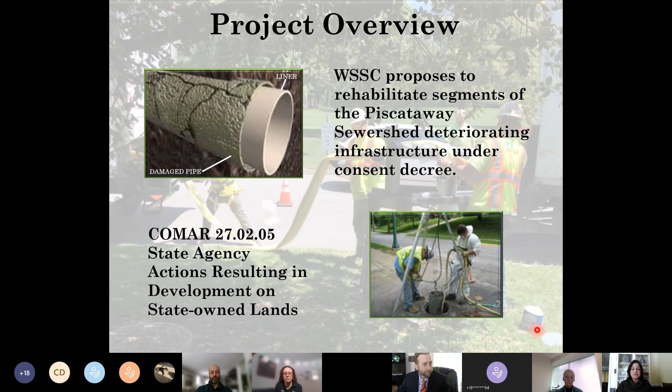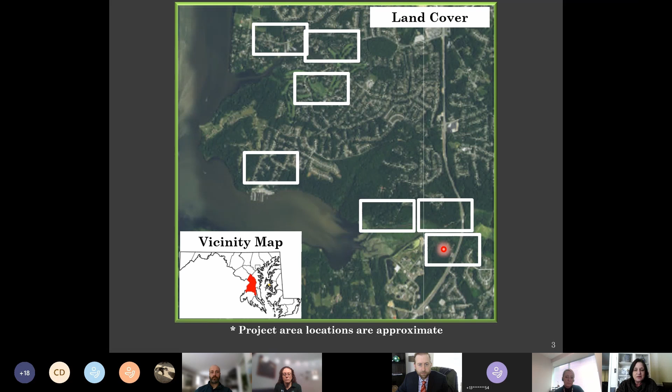Within the project area, there are steep slopes, hydric soils, highly erodible soils, and streams. You can see subdivisions impacted by the project areas, and natural resource parklands owned by Maryland National Capital Park and Planning or National Park Service. In addition, there are forest interior dwelling bird habitat areas within the project areas, depicted in green. There are also wetlands within some of the project areas, including both non-tidal and tidal, and forested and non-forested.

I did forget to mention, maintenance to existing sewer lines is permitted under the MOU between the Critical Area Commission and WSSC. However, the temporary impacts to the expanded buffer, which is considered an HPA, makes this property ineligible for review under the MOU. And because WSSC is a quasi-state institution, and since the project is ineligible for review under the MOU, we are bringing this project to you per COMAR 27.02.05, regarding state agency actions resulting in development on state-owned lands.

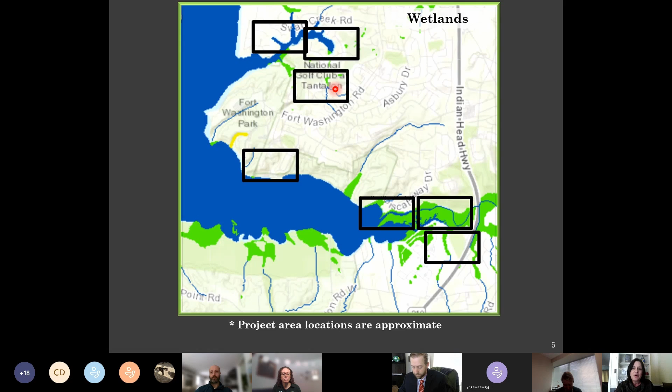So there are 6.91 acres of the LOD located in the critical area, of which 3.25 acres are located on lands designated as LDA, as depicted in yellow, and 3.66 acres of land designated RCA, as depicted in green.

I'm going to go through the next series of slides, which will be 7, and briefly discuss the impacts in each of the project areas and how it relates to the expanded buffer. The buffer has been expanded because of highly erodible soils, hydric soils, steep slopes, water bodies, and non-tidal wetlands. Here, project area 1 is delineated, showing where it is in relation to everything.

The red line depicts the expanded buffer, and the purple line depicts the critical area 1,000-foot boundary. The orangish areas are the LOD, where the areas of impact are. The buffer has been expanded for steep slopes, and the pinkish color is steep slopes 25% or greater. It might be hard to see, but there are little yellow patches intermixed, which are steep slopes 15% or greater. On this project area, we have the LOD impacting within the steep sloped and expanded buffer area, and also just within the 100-foot buffer.

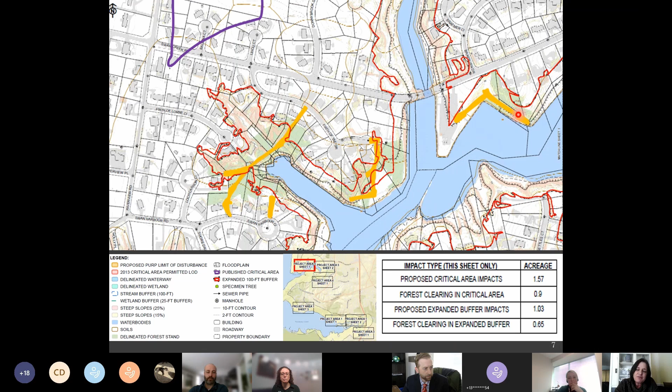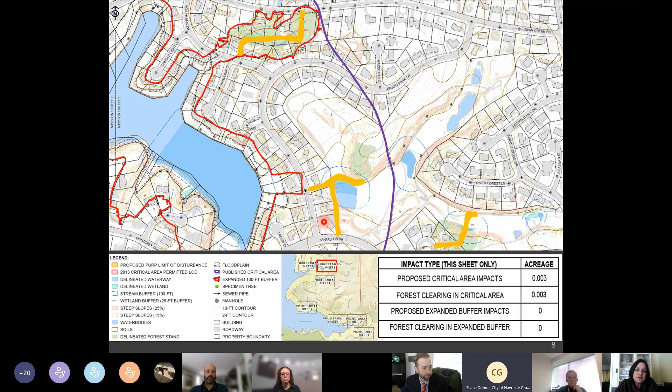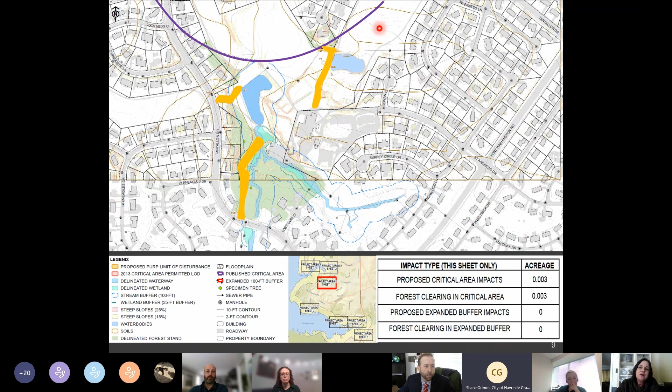Project area 3, you can see there were no impacts to the expanded buffer, just to the critical area. So here you have the critical area 1,000-foot boundary.

Project area 4, this is where it gets complicated with buffer expansion. We have steep slopes, non-tidal wetlands here in mint green, some waterways, and although not delineated, within areas of the steep slopes we have hydric soils and highly erodible soils. The buffer's been expanded conservatively to include most of the LOD, using the ridge of steep slopes to delineate, since you can continue to expand the buffer. So we made sure it was conservative to keep the LOD inside the expanded buffer.

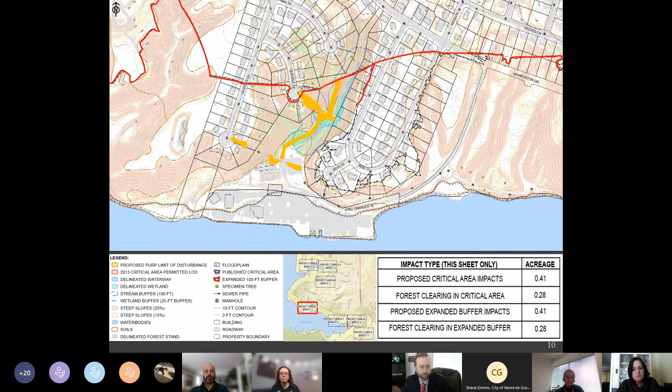Project area 5, it's the same scenario. You have the expanded buffer, the steep slopes, the non-tidal wetlands, and hydric and highly erodible soils.

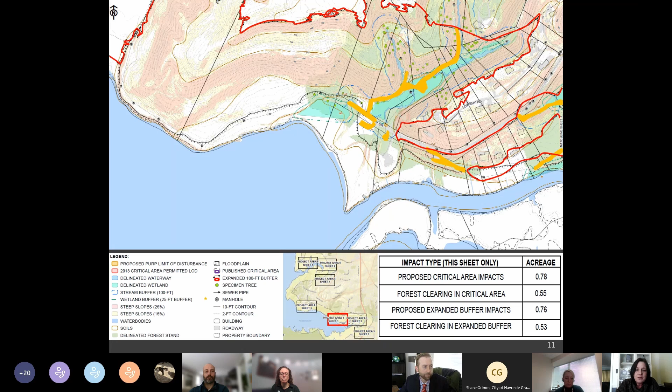Project area 6, same scenario. You can see the LODs are all within the expanded buffer.

And then project area 7, it's very messy here, but you can see the 1,000-foot boundary, and how the steep slopes really dictate how the buffer's expanded. So we have the LOD hitting inside the expanded buffer, outside the expanded buffer, as well as outside the critical area.

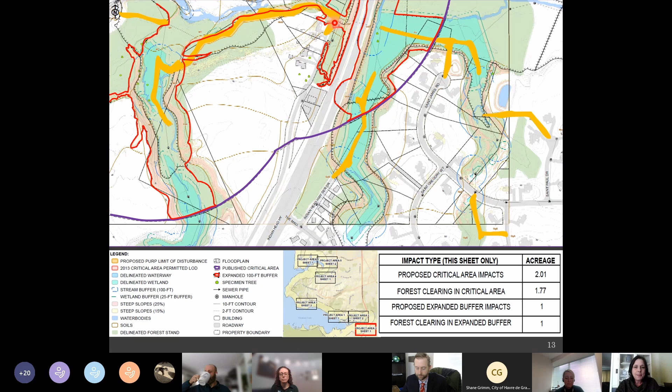So the proposed clearing in the critical area in total is 5.07 acres, of which 3.6 acres is located in the expanded buffer. Temporary impacts comprise 1.84 acres, to allow for site access to the manholes and to haul equipment. WSSC proposes to mitigate and provide 5.32 acres of reforestation at a rate of 1-to-1, both inside and outside of the expanded buffer.

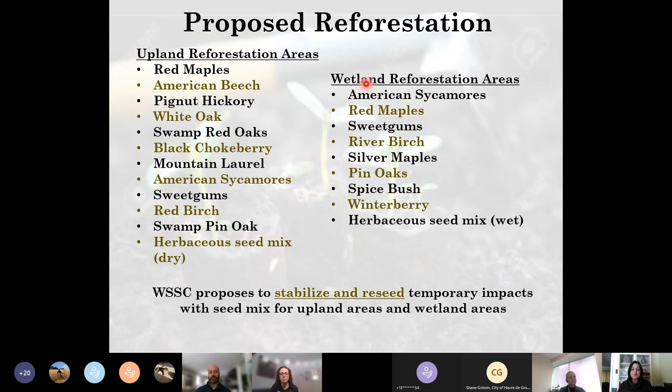Since the area is so vast and there are different types of soils, we have upland areas. Here's a list of proposed plantings for the upland areas to be reforested, and here's a list of plantings for wetland areas to be reforested. All reforestation goes back into the cleared areas because the project's lifespan is 50 years, further minimizing impacts to the expanded buffer and critical area. Temporary impacts will be stabilized and reseeded, using a seed mix for both upland and wetland areas.

Because this project only has temporary impacts, there's no action required for the 10% rule. In addition, since everything is temporary, coastal resiliency is also not an issue for this project.

The status of other agency reviews is as such: the Maryland Department of the Environment's authorization for impact to non-tidal wetlands is pending. Stormwater management is not required for this project as impacts are temporary.

WSSC has authorization to approve sediment and control plans for construction projects per COMAR 26-17-01.04B, which was approved on November 23rd, 2021.

The Department of Natural Resources Heritage Service found there are no impacts to RTEs in the project area, and any impacts to FIDS habitat mitigation will occur at a rate of 1-to-1. Maryland Historical Trust's determination for impacts to historical properties or archaeological areas is pending.

The public notice was posted or advertised in the Washington Post on November 15th, 2021, and signs were posted within the site areas on December 17th, 2021.

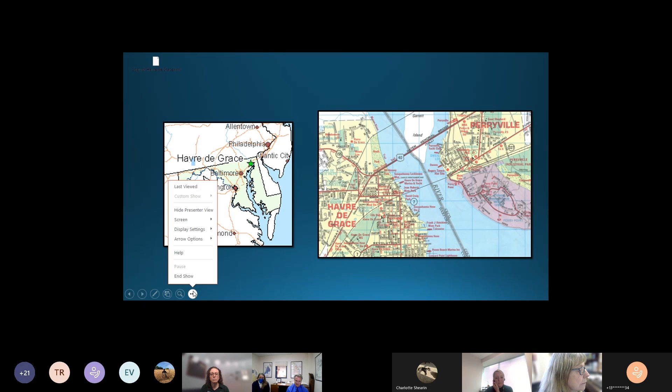Just about 10 miles north of Havre de Grace is the Conowingo Dam, you might have heard of it. Just downstream from Havre de Grace is an area known as the Susquehanna Flats. It's one of the largest areas of submerged aquatic vegetation, or SAV, in the bay, and it ranges between 5,000 and 8,000 acres per year.

The project components - it's quite the ambitious project. It includes a boat ramp and soft kayak launches, parking, living shoreline, with the idea of providing climate resiliency along the shoreline, and a step pool conveyance system. They're hoping to use some of these other projects to create educational opportunities, and they are also getting MS4 and TMDL credits.

The project location, you can see outlined in red along here, and you can also see the Amtrak bridge line that goes across to Perryville and Cecil County.

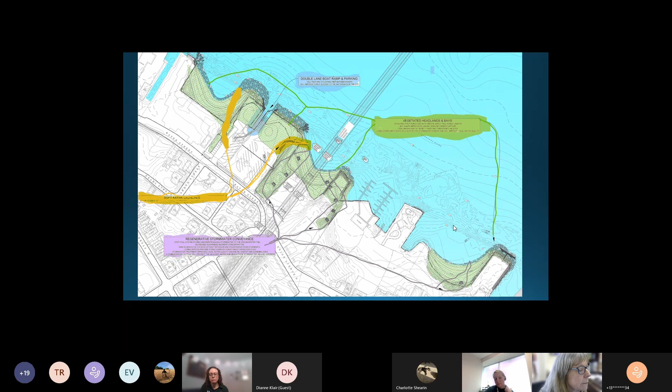The property history - it was once used for petroleum and pesticide storage and transfer. The storage tanks themselves were removed in 1999, all of them. An environmental assessment of the soils was conducted in 2004, again in 2013, and again in 2017. Some areas were found to be contaminated with hydrocarbons, lead, arsenic, and mercury, to name some. A soil management plan has been approved by MDE, which limits soil disturbance in specific areas and requires capping in others.

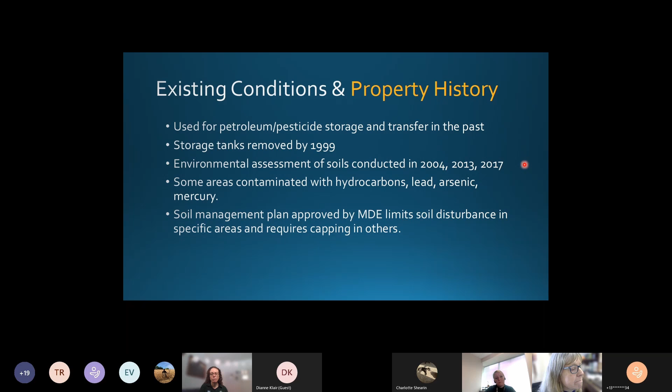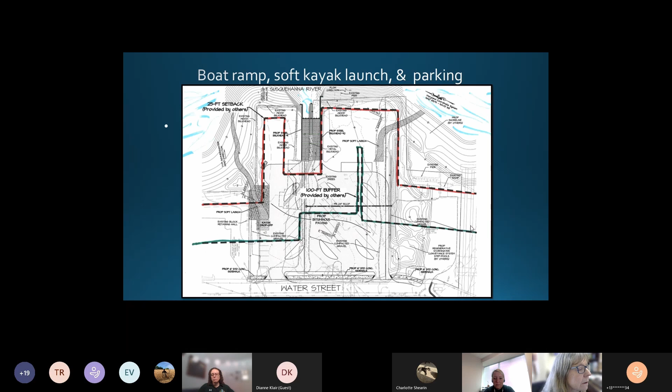The step pool conveyance system, as I mentioned, is 3 separate systems. It will open up or daylight some existing outfalls that release untreated water into the Susquehanna from the park site, from the Amtrak right-of-way, from the adjacent street, and from off-site drainage areas as well. It's designed to use cobble weirs to slow stormwater runoff and increase upland water storage in the step pools and subsurface sand filter beds.

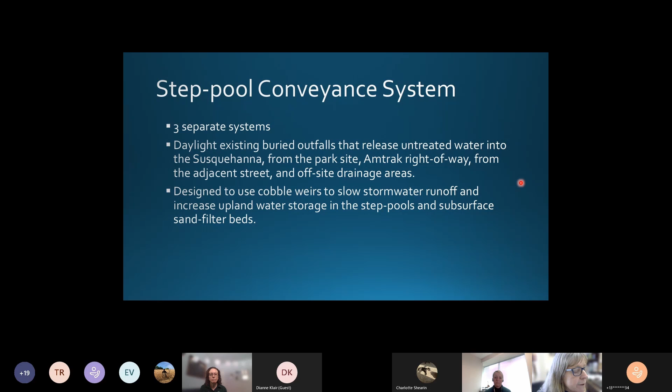The living shoreline component is pretty extensive. It has reduced in length from what was in your staff report. It is now 2,482 linear feet. From my understanding, one of the private property owners pulled out. It is proposed to be a maximum of 103 feet channelward of mean high water.

SAV impacts may be up to 2 acres. Approximately 259 linear feet of revetment is being removed, but the majority of the bulkhead and revetment will be left in place. It will be filled with sand, gravel, cobble, and boulders to create area for marsh and terrestrial plantings and slope to help with climate resilience.

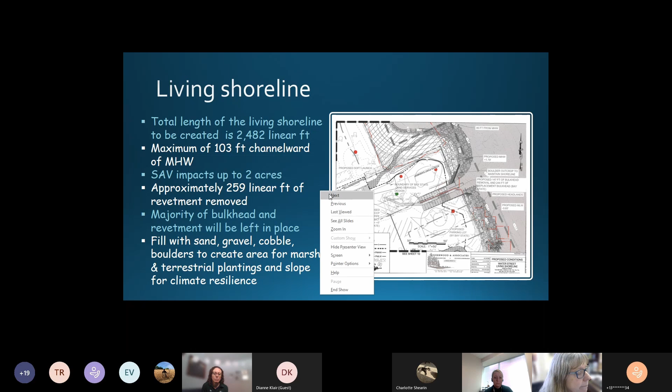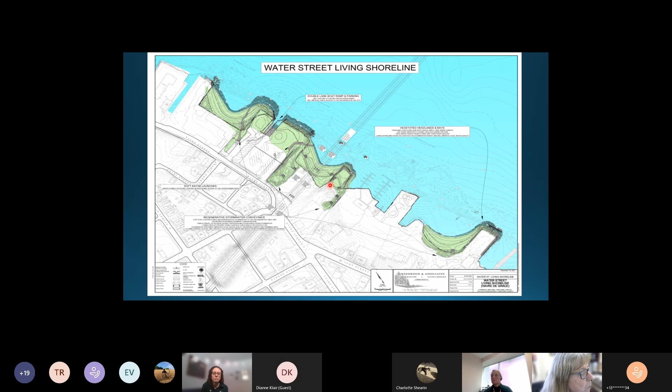Just to look back at the full site, the areas of green are essentially the areas where the living shoreline will be. You see the cobble and boulders and some woody debris along the shoreline, and the green areas will be planted for the most part.

The critical area buffer impacts and mitigation: for the boat ramp and parking area, 2-to-1 mitigation is required within the 100-foot buffer and the 25-foot setback, and 1-to-1 credit is given for some. For the clearing for the entire project, 1-to-1 mitigation is required for vegetation cleared for the living shoreline, and 2-to-1 mitigation is required for clearing within the 100-foot buffer.

The total mitigation required works out to be 69,403 square feet. The total planting proposed is 74,461 square feet. In addition to that, there will be 1.87 acres of high and low marsh that will be created and planted.

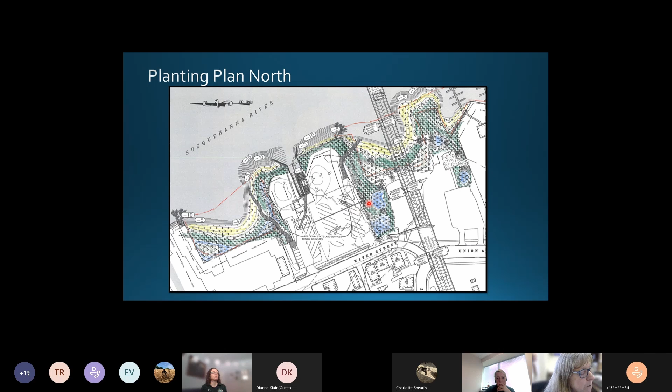The planting plan to the north of the Amtrak bridge: the yellowish is the tidal marsh that will be planted. The green area with the squiggles will be a combination of trees, shrubs, and herbaceous vegetation. The blue is plantings within the step pool conveyance system. You have the same thing to the south.

Oops. What's happening?

The 10% phosphorus reduction calculations were based on an LOD of 7.41 acres, which consists of 6.87 acres of existing impervious surface. The proposed impervious surface will be less than that at 7.05 acres. The calculations result in a phosphorus removal requirement of 2.01 pounds. The step pool conveyance system will reduce phosphorus loadings by a total of 14.36 pounds.

The step pool... Oh, it's not doing it? I can see it, but it's not in the regular mode. I guess this right there. Huh, I don't know what that's about.

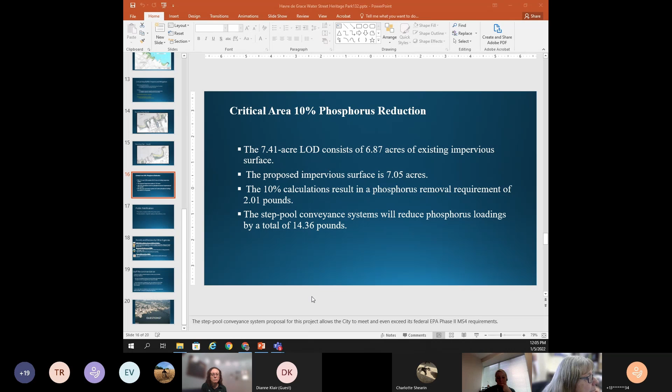Anyhow, this stormwater management proposal will allow the city to meet and even exceed their federal EPA requirements for their phase 2 MS4 needs.

For public notification, they've met this requirement. It was posted at 3 locations within the park property. The notice was placed in the Aegis bi-weekly on November 10th, 2021.

Review and permits by other agencies: DNR Wildlife and Heritage Service and U.S. Fish and Wildlife Service. There is the state and federally endangered short-nosed sturgeon and Atlantic sturgeon in the region, but the agencies believe that the probability of encountering either species is very low due to how rare they are.

The Department of the Environment has approved the sediment and erosion control plan and a soil management plan on December 1st, 2021. The approval of the stormwater management plan is pending. Maryland Historical Trust has determined that there will be no impact to historical and/or archaeological resources.